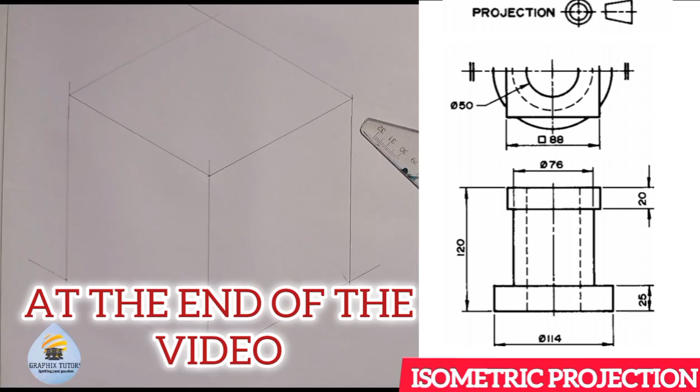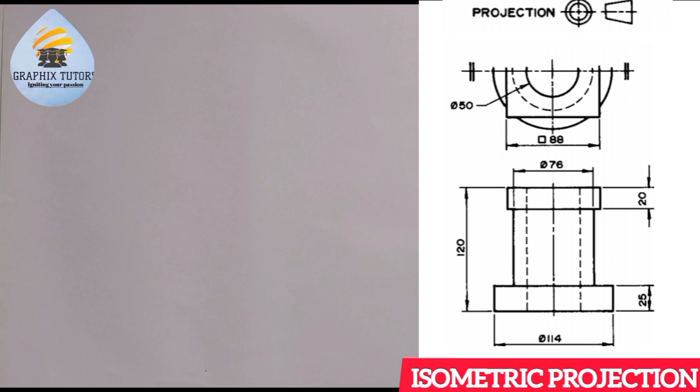If you look at the right hand side of the screen, you will see two views of a given figure, and that is in third angle projection because of this symbol you see at the top here. And we are told to assemble this figure in isometric projection.

Now when you hear the word isometric projection, the first thing you have to do is draw your isometric axis, taking your set square, 60-degree and 30-degree. You draw the vertical line this way.

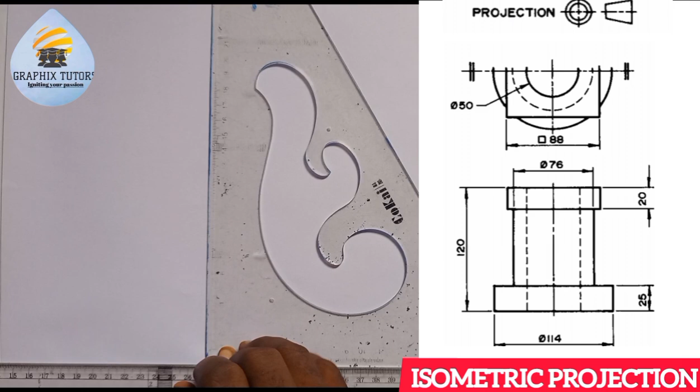You can see that. And you draw the two inclined lines at 30 degrees this way, and also this way. Hope you can see that.

Now when you've done that, another most important factor is to get the entire height. The height is gotten from the elevation, and this is the elevation. The one under is always the elevation when it is third angle projection. So the entire height is 120. So I am going to measure 120 from this point here.

120 from this point, from 0 to 120. This is 120 here.

Can you see that? And the entire width is given to be 114 on both sides because it is a diameter, so it is circular in shape. And for you to get a circle or a circular figure, you need a square. So that means everything all here will be 114, and here will be 114.

So I am going to measure 114 at this point here. So from 0 here to 114. Can you see that?

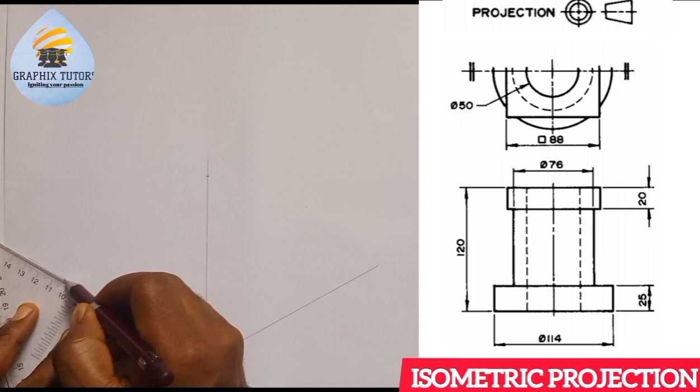I'll do that on both sides, so I can easily just carry my instrument here, and place it at this point. This is 114 here. Hope you can see what I'm doing. From here, this is 114.

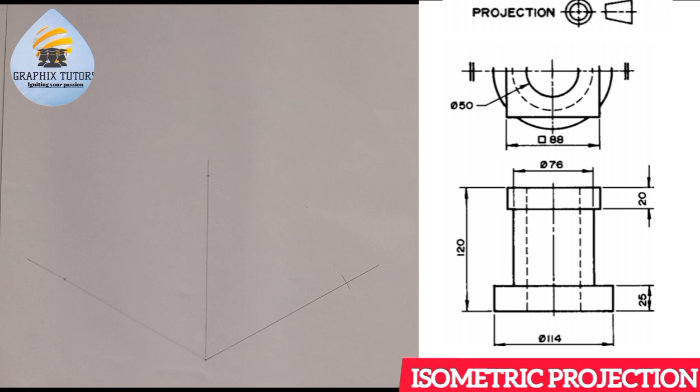I'll just transfer it from this point to this point, so it is 114 too. Or you just measure it if you want to. You can take your instrument, also place it here, and you still get that 114 that you are looking for. So this is the 114, still the same 114 here.

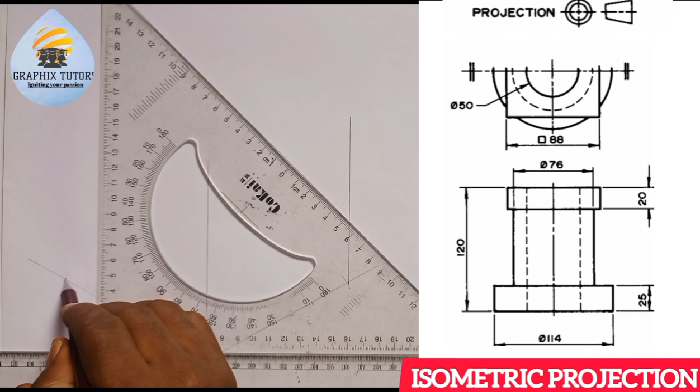Out there, and I'm going to project this point up from here. This will go up from here, this way. Can you see that?

And at the highest point, what I did at this point here, I'll do it at this point too. So once I place it this way, I'll have this. I'll come here too. I'll have this. Hope you can see that.

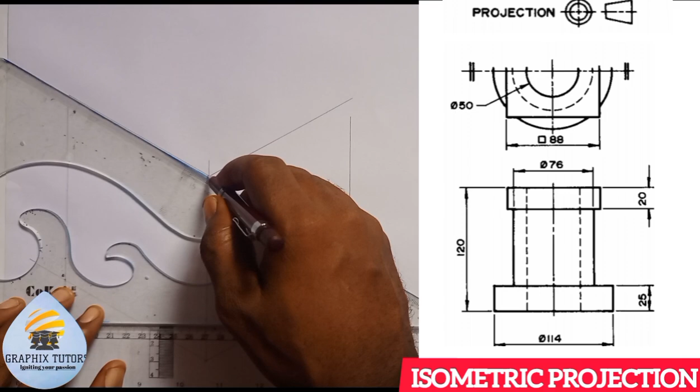So I should be able to complete this so it will touch. This too, so it will touch, this way. Can you see that? Now aside that, I'll close it up.

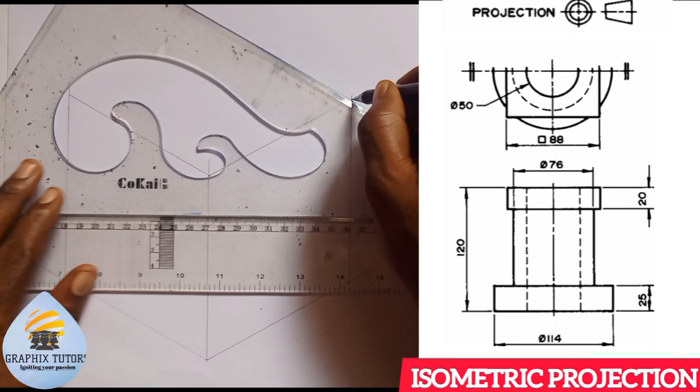Do the same 30-degree here and here, but only do one side. And I'll come here too. I'll close here too. Can you see that? So this is what we have here.

Now let's start from there, from the base here. Say it's circular in shape, so the height is given to be 25. So I'm going to measure 25 here, as you can see from the figure. So from here, this is 0 to 25.

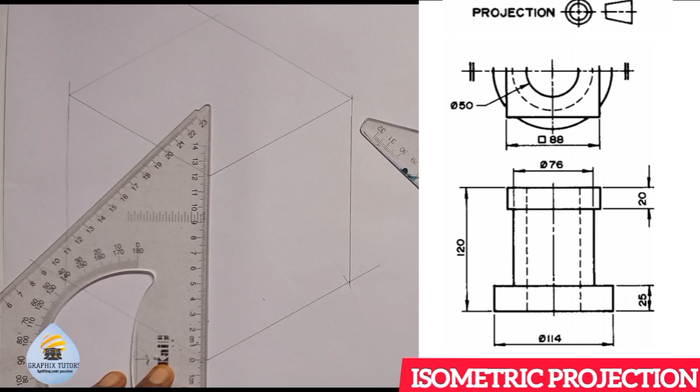Can you see that? 25. Out there. And I will just use it to form another box at the base and at the top.

So let's do this. Let's first of all take this up, and also do this too. Can you see that? And I'll come here too, close it up.

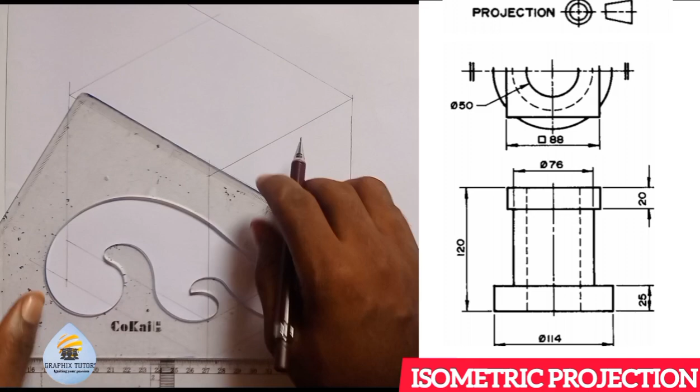I'll come here too, close it up. Can you see that?

So what I can do here is join the longest diagonals. See what I'm about to do? Join the longest diagonal. Before that, let me complete this base too here.

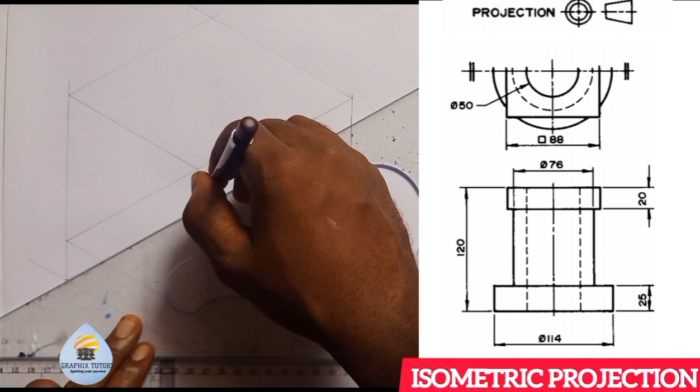So I have joined that. Is that okay? So see what I'm going to do here.

It's both the same figure. Let me show you that, what you can see. So I will just name them. Let me just name here to be 1, here to be 2, here to be 3, and 4.

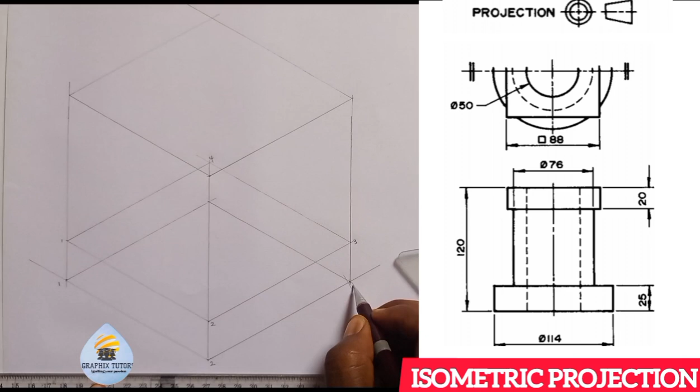So if here is 1, here 2 is 1, here 2 is 2, here 2 is 3, because it's the same. Here 2 is what is 4. Hope you see what I'm doing, just to enhance your understanding.

So I'm going to construct a circle here. Why would I construct a circle?

What I can see in my elevation is like a rectangle. The reason is two: one, because it's the diameter, and the other is if you look from the plan, you see that we have a circular figure there.

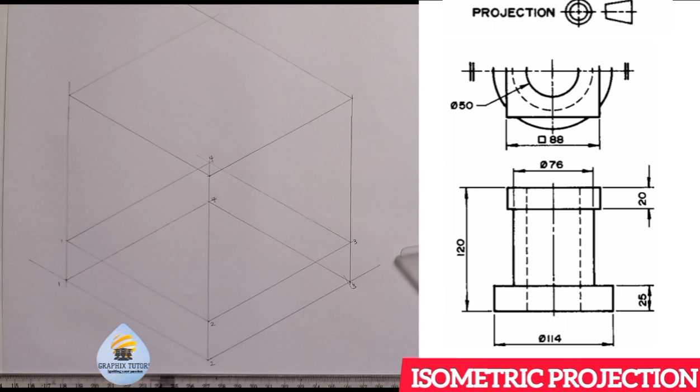Is that okay? Now I will join the diagonals. Let me start from this base here. So if I join this to this...

Can you see that I've joined the diagonal? And if I also join this to this, 2 to 4, they are meeting here, right? That will be the center of the diagonal there. So I'll just draw a line that will pass in between it using my set square.

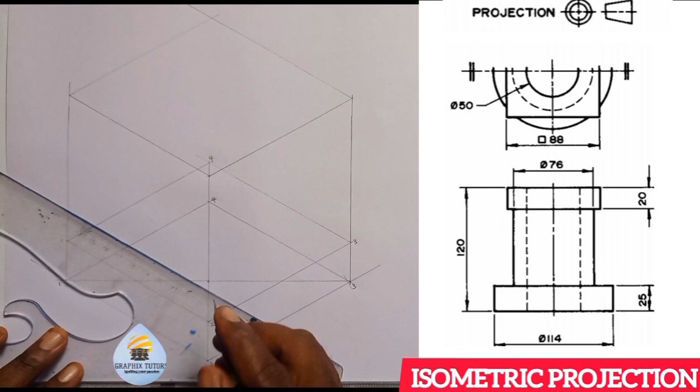Remember, I'm using my set square and t-square simultaneously, it makes my work easier. So I'll place it here, I'm having this, and I'll come here also, I'll place it here, I am having this.

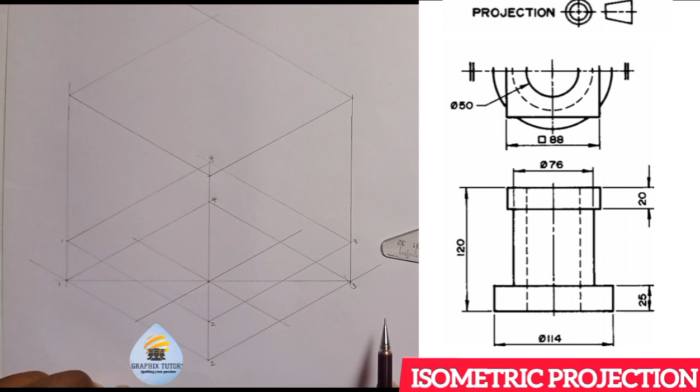Talking about the ground one here. Now, since I joined the diagonal here, using the ordinate method of construction of ellipse, I will from 4 connect to, let me call it to be A, right? And let me call it to be what?

Touch B. So from 4 I will draw a line that is going to touch A, and from 4 I'll draw another line that is going to touch B. Can you see what I've done? So I'm having a new point here, which I'll call point P, and point Q. Is that okay?

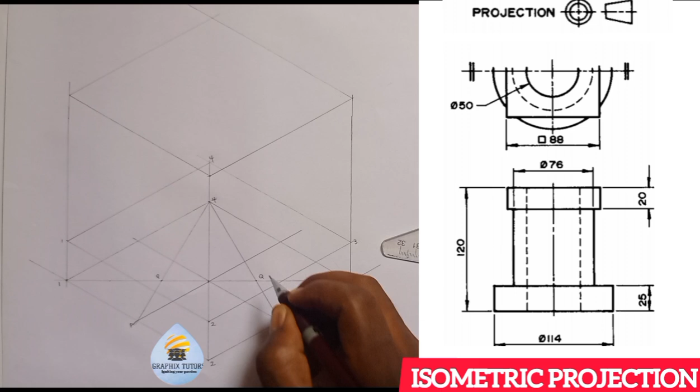So once I've done that, I can now construct my circle. Before that, I'll take my compass.

Before that, I'll draw another diagonal. You know, I connected from 1 to 3. I'll connect from 1 to 3 again. Just see what I want to do. 1 to 3, can you see that?

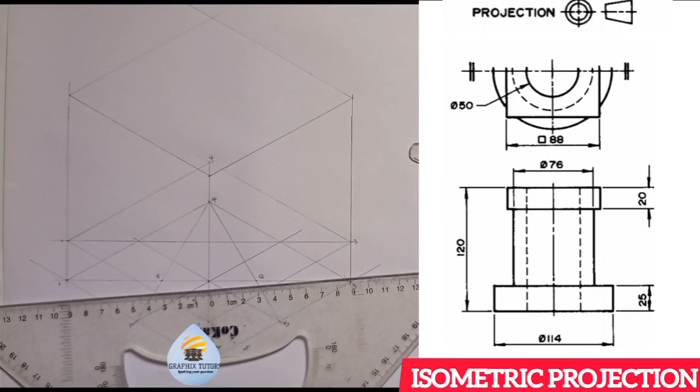So I don't have to redo all these things again, I'll just transfer the point. Placing my instrument on my t-square, I'll just move it to where Q is. I'll transfer the point up here, I'll get another Q. I'll go to where P is, I'll transfer the point here.

I'll get another Q, another P. Then I'll come here to get another A. See, can you see that both A's are in the same position? I can mark here and mark here, they're in the same position. I'll come here, B also the same position since it's a square. What affects here will affect here and also affect here.

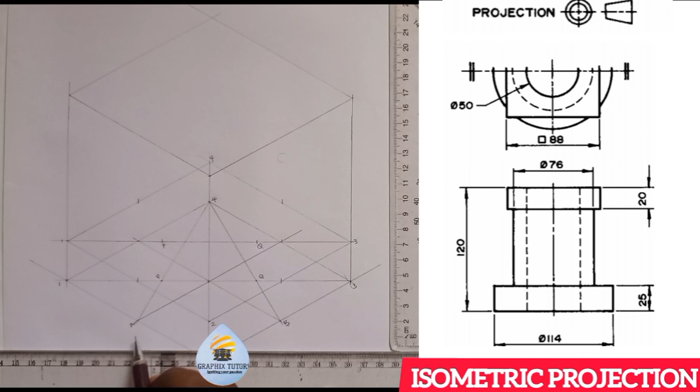Can you see I've gotten this 3 points here? So this is A, here also is what is A. So let's not get too much line.

So if I come to 4, if I should come to 4 here, take my compass to this point here, I'll get this.

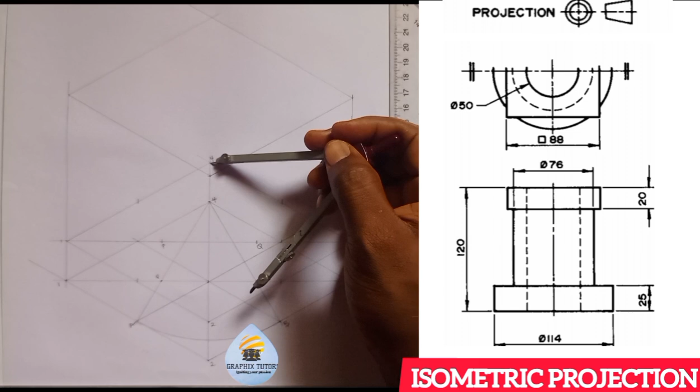Hope you can see that. I'll still come to 4 again, the other 4 too here. I'll do the same thing too.

Hope you can see that. I'll come to P at the base here. I'll take it to this point here. Then I'll do the next one. Then I'll stop here.

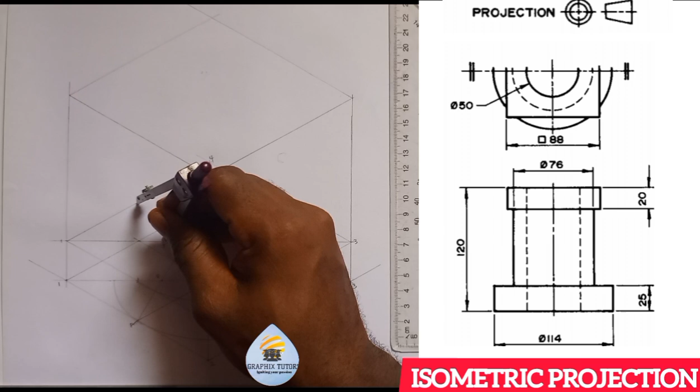I'll come to P at the top too here. I'll do the same thing too here. Hope you can see that. Let me just draw this. I have my reason, faint line.

I'll come here to Q also at the base here. I'll do the same thing here. Hope we're together.

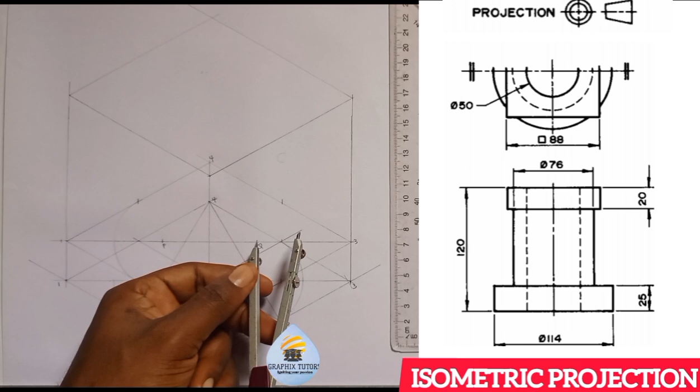Let me just stop there. I'll come to Q at the top here too. I'll do the same thing too. Hope you can see that.

So at the back I can't see anything, so I'll just stop here first because with the figure standing I cannot see anything at the back. As we proceed you'll get to understand.

But if I want to complete the circle, I'll just place it at 2 here. Take it to this point and I'll complete it. Can you see that? I'll come to the other 2 here.

Sorry, take it to this point here. Then come here and I'll take it to this point. The same thing. So in doing that, we are moving forward.

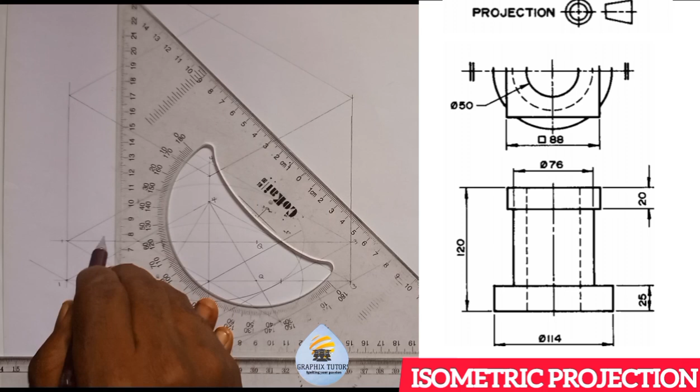So you just draw your line from here to close it up, and you draw your line from here to close it up. So we're coming, we proceed. So there is, if you look at the figure closely, there's another circular figure you can see here.

Look at these two lines from here to here. This is distance 76 and the diameter. Mean that what? There's another circle in between here. So let's do that and see. There's another circle in between there. So let's do that and see.

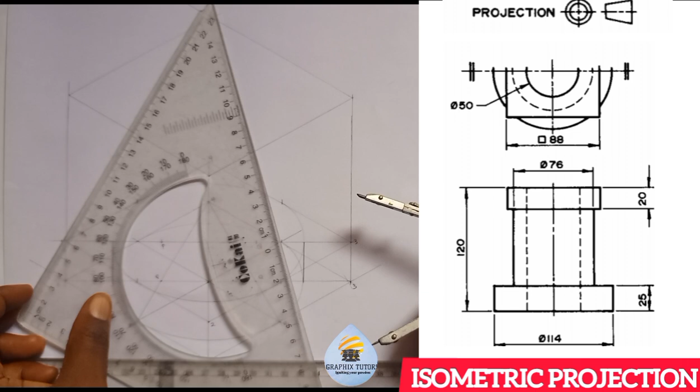So 76, half of 76 is what? 38. So I'm going to measure 38, right? From 0 to 38. And when I place it at the center here, I'm going to mark 38 in all directions, right?

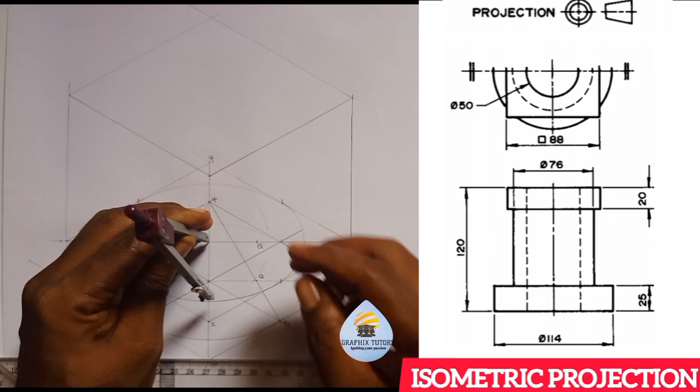So I'll mark in this direction. I will mark in this direction. I will mark in this direction. And I also mark in this direction. Remember, I already have AA here.

So I can take my instrument and draw lines. From this point here, I measure. That is half of that line. So any line I draw from here, pass to the center to the next point. I'll come again, the other line too. Pass to the center like this. Hope you can see that.

So at this point here where they meet, that is what I'll use to form another box. So let's do that and see.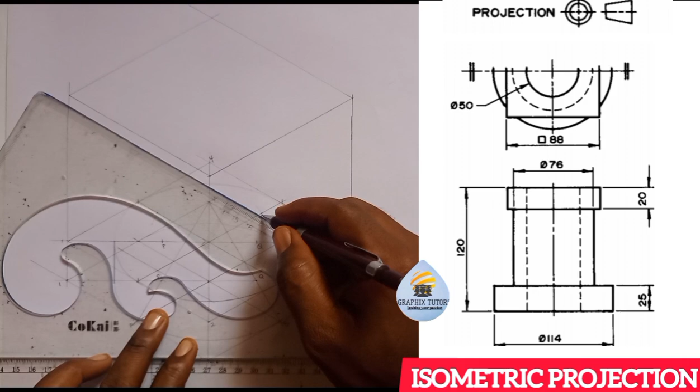So if I come here, I will just draw a line this way. I'll come here too, I'll draw another line this way. I'll close here up to this way. And I'll close here up to this way. So let's close it well.

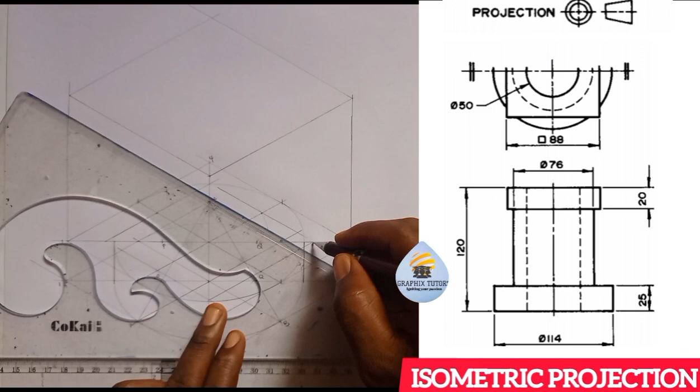And here too, well. So this is where they are meeting. They are meeting at this point. So don't get carried away.

So once you've done that, it looks much, right? So you just draw another circle there. The same way, you can draw a line from this point. Let me call it point arrow. Then you draw it straight to the next.

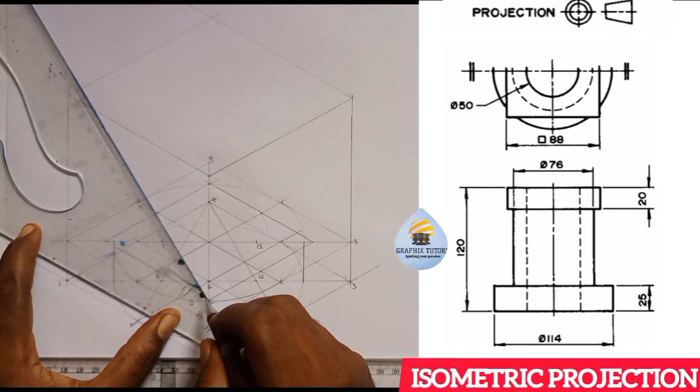Let's see. From this point here, this is where it is. Point what? Point arrow here. I'll draw a line to get to the next point here. So where it intersects here is another important point. From the next arrow here again to this next point here, I'll have this. So they are meeting at this other important point here too.

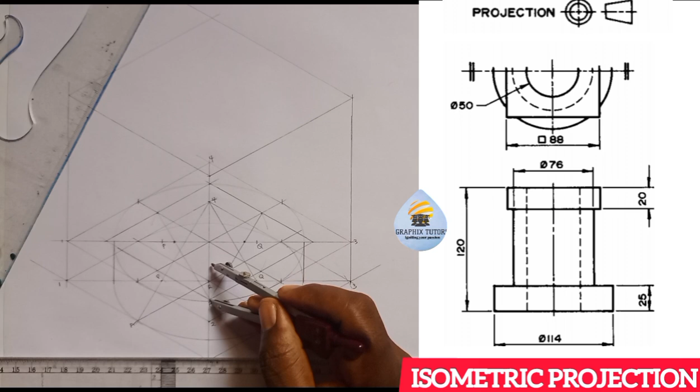So what I will just do, take note, the same thing I did initially. I'll just from here, right? Actually, we need to start from 4 here. This 4, I'm focusing on this outer one here like this. So from here, I'll take it to this end here. Hope you can see that.

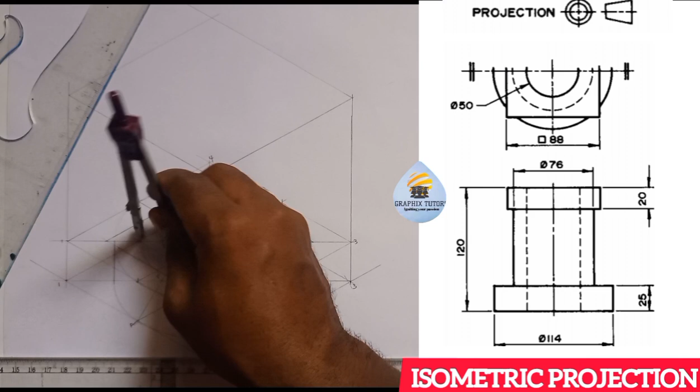So from here, I have this. From here, I have the next one too here. Can you see that? From here, I have the next one too here. I'll extend it.

And from here, I'll close it down. I don't really need that one. This is what we have there. I'll still take them out.

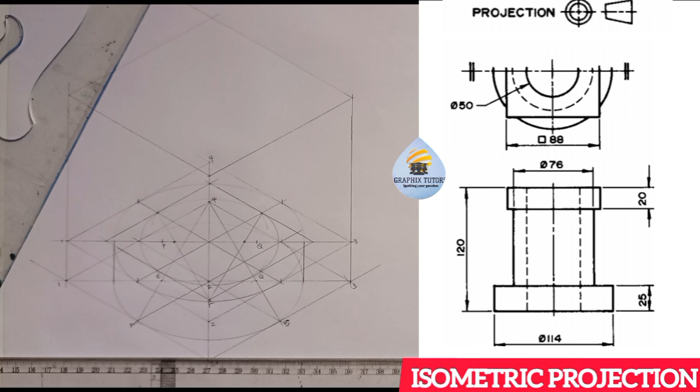So the next one is that cylinder is going straight up to a height of what? To the highest point here. So what I will just do to get the highest point here is look at what I want to do here. The highest point is this point here. So if I should draw my diagonal from here to here.

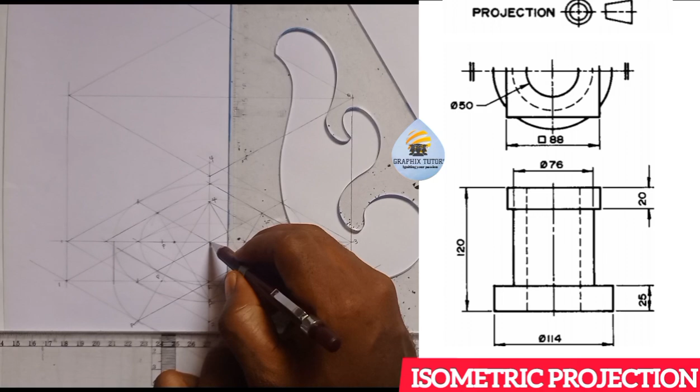See what I'm doing now, right? And I want to get the center. I will just project this center here straight up. So this is where it is. So at that point, I will draw my line to go through, get another one to go through. That's what I really need, right?

So let's proceed. Now the same thing that affects here will affect the other side. We have another circular figure. If you look closely, that circular figure is hidden. That means it's not coming to the top, it's only stopping 20 millimeters down. It's not coming to the top, it's only stopping at the base 20 millimeters down.

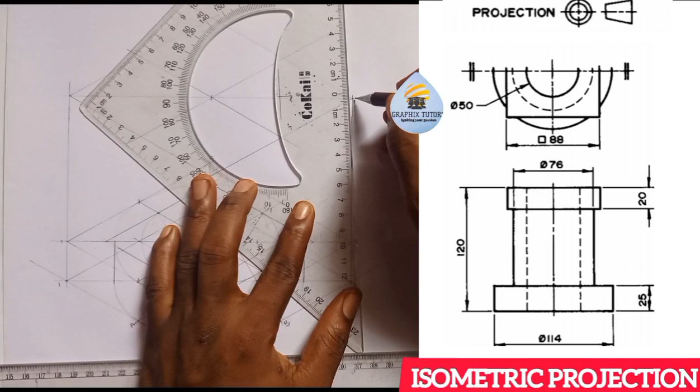So that base is a rectangle, like a square of 88 millimeter round, right? So I'll take 20 millimeter down this way. See what I want to do? From here, I'll take 20 millimeter down from 0. Let me do it here. From 0 to 20 down. Use it here. Then I'll draw.

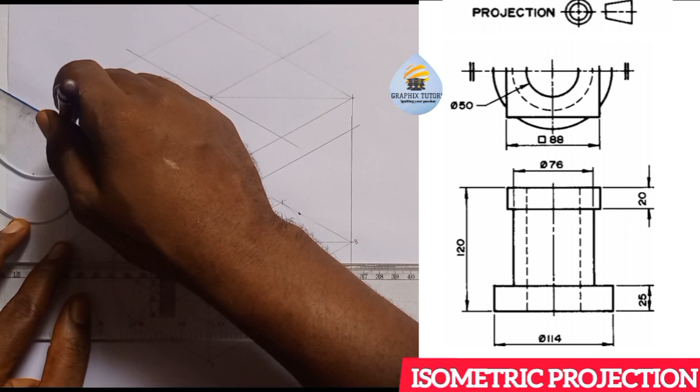This thing here. So I'll just come from here and I'll close here at this point. At this point too. And at this point too.

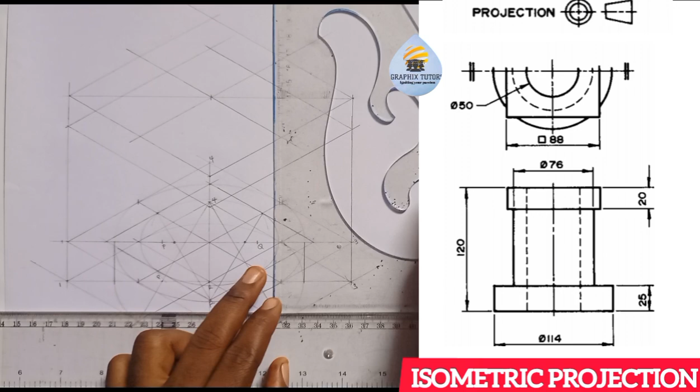So there's another circle there. So what I will simply do here is that I can bring out that rectangle out first, or I'll do this again. See what I want to do. I'll just bring these two points down. This point, and this point, in both sides of that baseline, the underlined. So I can easily join them together.

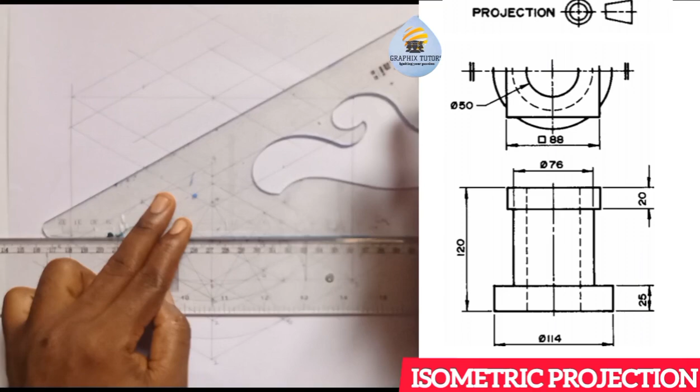So I can easily join them down. This is another center here. So what I will just do here is bring out that rectangle.

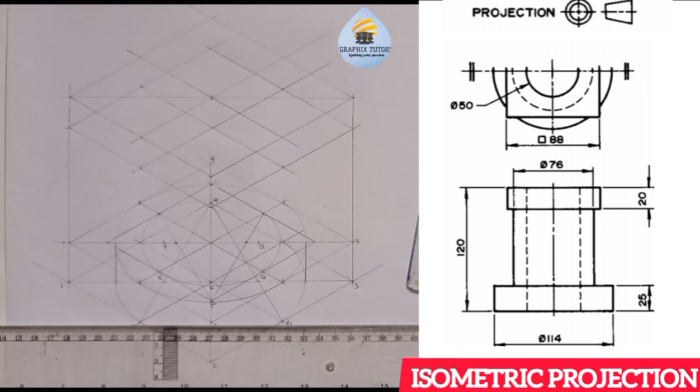Just take this up, see what I'll do. I don't even need that, but let me just show you something. I'll just take that rectangle up of 20. Now what is the distance? I said 88. Just take your meter rule and measure 88 on your meter rule, 0 to 88.

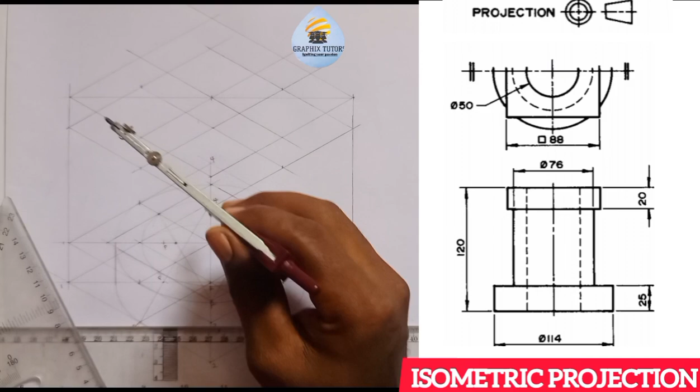Can you see that? Then I just come to the center and mark 88 on both sides. That's 44, I mean, sorry, 44. If I place it here, I'll mark 44 to the left, 44 top, right, and down. So draw your box through that, and you can easily tick it in.

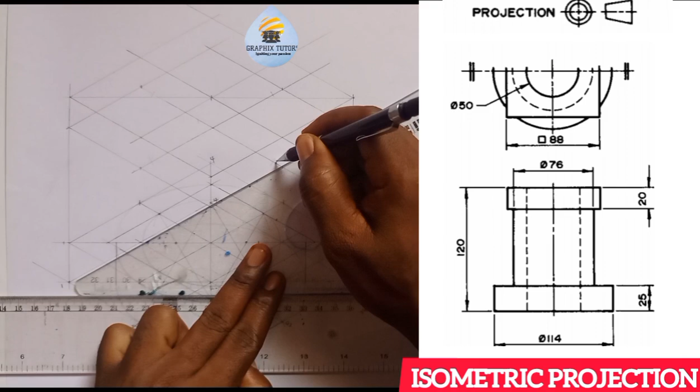Let me draw it out. This first, and this first. Then these two. So I can easily tick in from here straight down to touch here. You can also tick in from here. Let me draw this out.

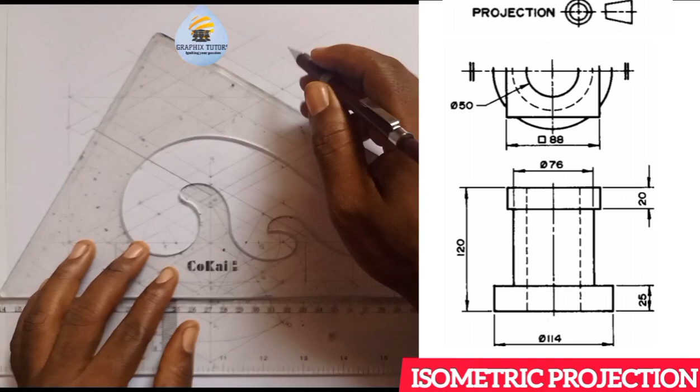So we have these two, straight line. So I'll take it from this point straight down to touch here, right? Is that okay? So we move to the next one.

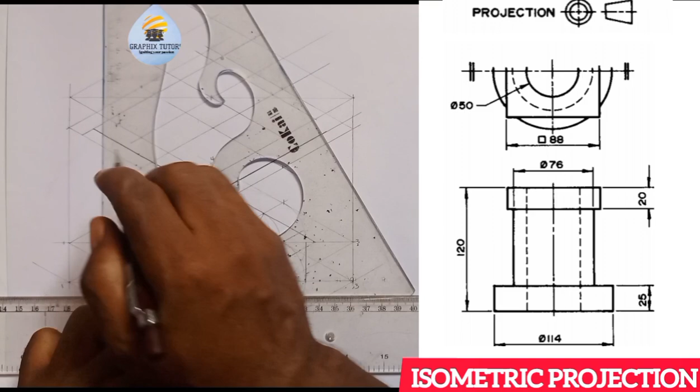We're not done yet. So this is going up too. All this edge is going up. All this edge is going up, and the last edge here is also going up, out there.

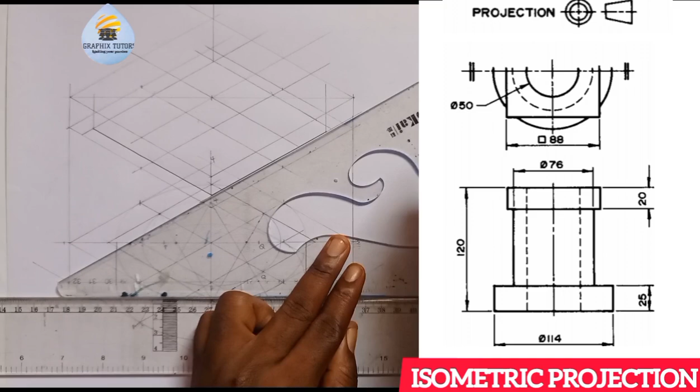It will be going up by 20, right? It will be going up by 20. So we know from here to here is 20, as I measured earlier. So I can just come here and mark 20. So that's what I'll stick around like this. So from here, this will be taken to this point.

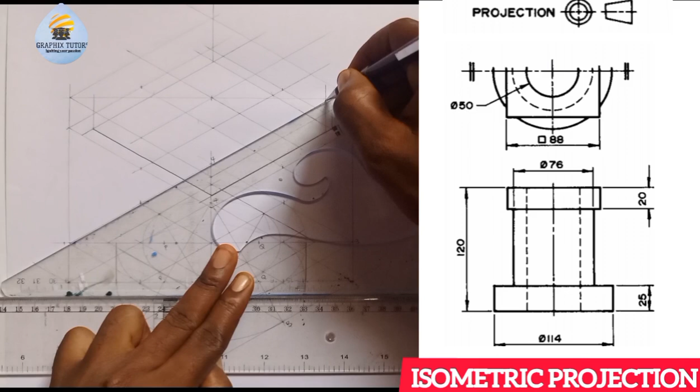Then this to this point. Then this point, right? And we need to have a square figure at the top, so I'll close it up.

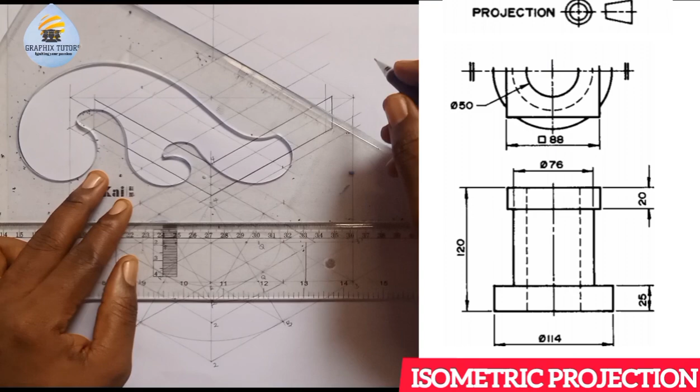Then this will go this way, and this will come this way. These two will come this way. Hope you can see what I'm doing. And I'm going to take it in here.

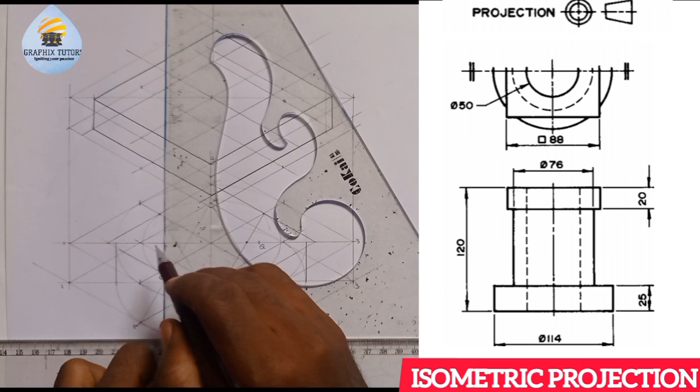So now, what I'll simply do is, at this base here, this point here, I will take a line up. That line you see my arrow is pointing, I'll just take it up. It goes straight up, not obstructed, to touch here.

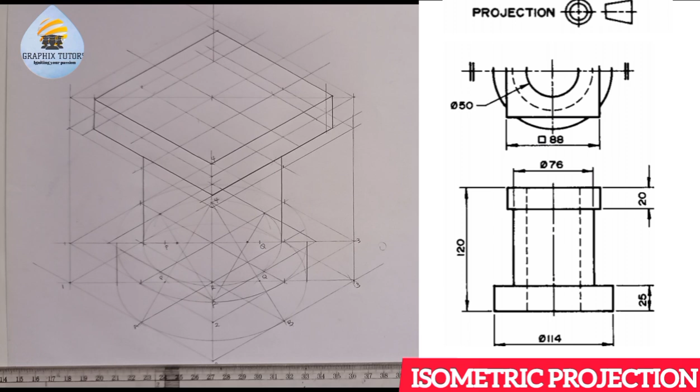The next one too, from here, straight up, touch here. Then I can easily just stick it in here now. So let me thicken the base to save us. Let me thicken all these lines you see here.

So the hidden line you see here is telling me that this cylinder is not coming up, it's only at the base there. So what is actually coming up is this internal one that has a diameter of 50, as you can see here. So there's another circle which I'll just construct peacefully, right?

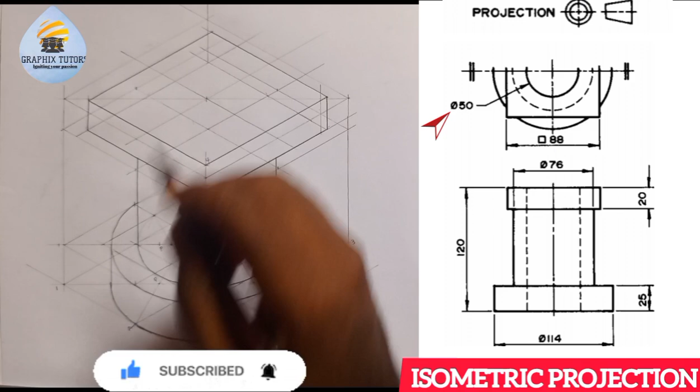So let's just measure half of 50, which is 25. So I've lost this here. I'll mark 25, it's already there. 25 and what, 25? Can you see that? So let's close it up.

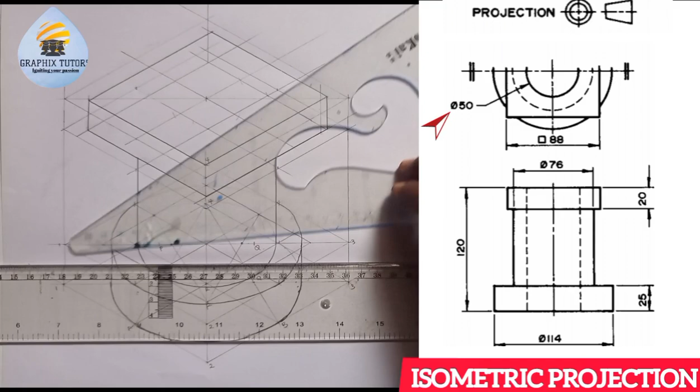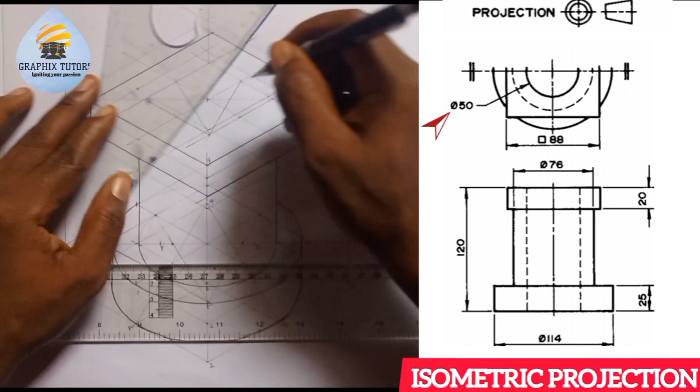What we have here, and we have these two. So this is it. So join from here to this point, and join from here to this point. So they are meeting here. So you don't do the same thing that you've been doing all this while.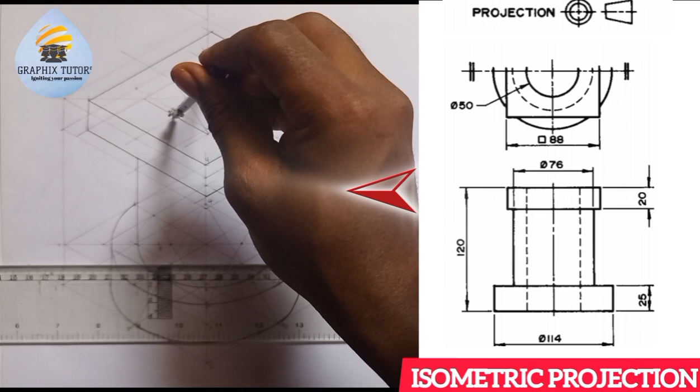Connect this to this. Come here also, connect this to this. Right, then you connect this to this. Then you connect this to this.

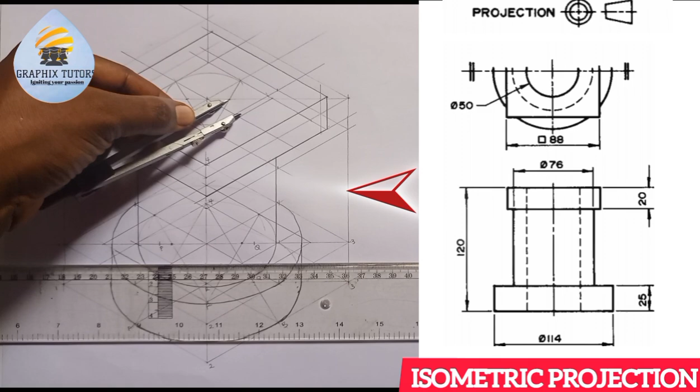Hope you can see that. So I can take it out like this. So this is what we have here. We have successfully reproduced the figure that is displayed at the right hand side of the screen. The hidden line you're seeing here is this circle that is going through into the base, right? But you can't see that from here. This is what we have here.

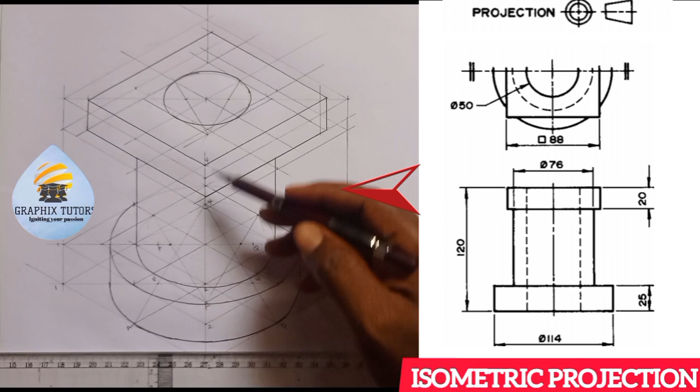So we've transformed the figure you see at the right hand side of the screen into isometric projection.